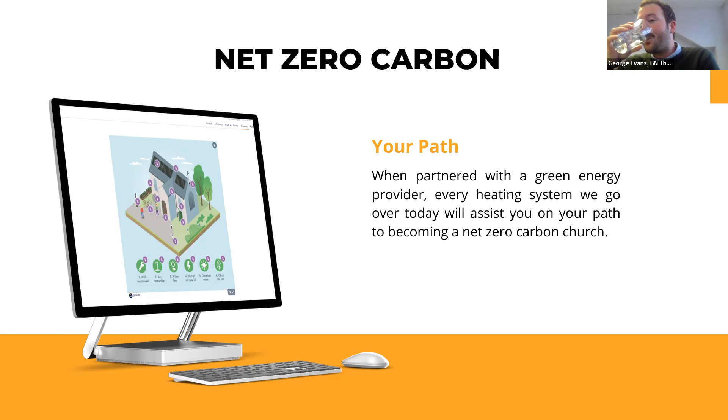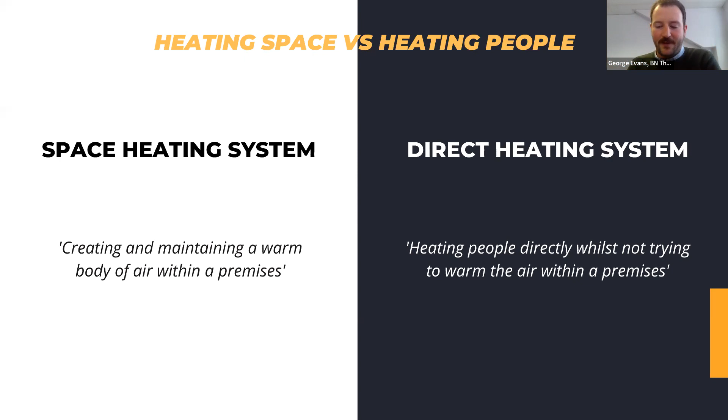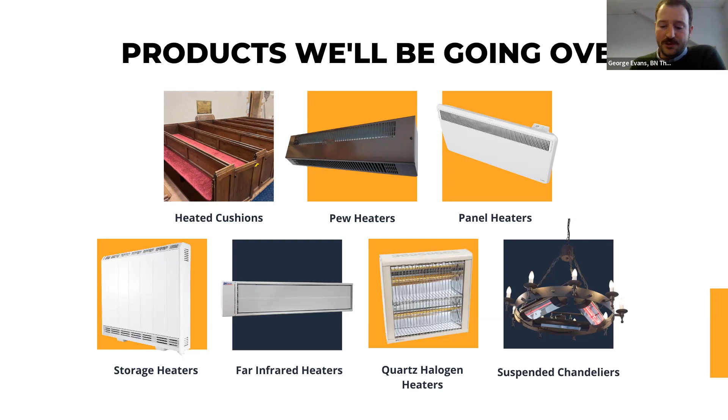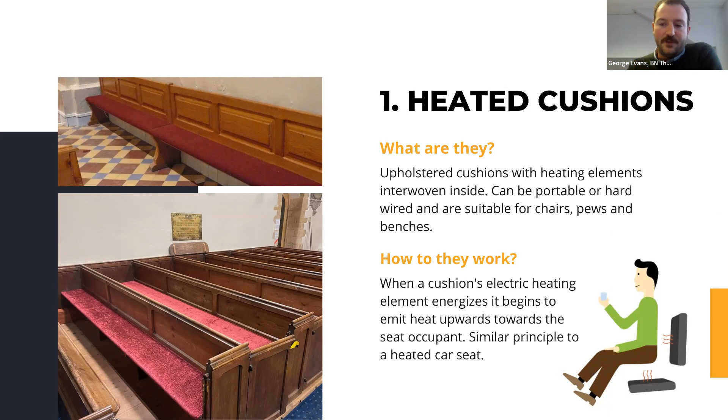How they work: when a cushion's electric heating element energizes, it begins to emit heat upwards towards the seat occupant, a similar principle to a heated car seat. In my little diagram here, my little man in the green shirt, his system has a heated seat and a heated backrest. In the photos, they're just a heated seat, and a lot of them are custom made for the size of your pews or seats.

Space heaters or direct heaters: for all of these slides I've put a little gauge in the bottom left. Heated cushions are definitely direct heaters, direct people heaters. Heated cushions are designed to live on pews or seats and directly heat occupants. Their main role is not to try and warm all the air within a church, it's about heating the people occupying a seat.

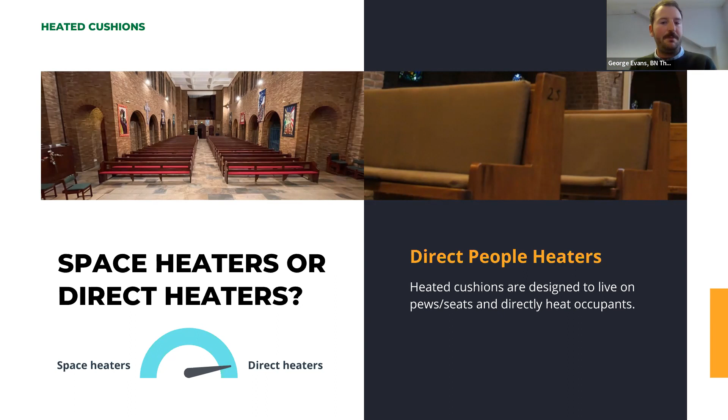Going back to heated cushions, I'd say an intermittently used church — they're very suited for those, where people come in on a Sunday, you turn them on 10 minutes before a service and then turn them off when you're finished.

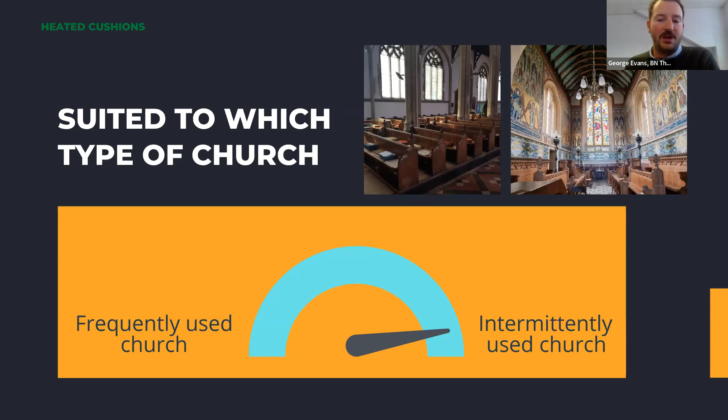So the pros for electric heated cushions: unobtrusive. Heated cushions are incredibly unobtrusive and emit no light, noise, or draft output. They go virtually unnoticed.

Incredibly economic. Heated cushions require virtually zero warm-up time and are usually only on for an hour at a weekly service.

Aesthetic and comfort. Heated cushions usually come in different fabrics and designs to match or add to the aesthetic of your church. They also tend to be made using soft insulation, so they are quite comfy to sit on.

One of the pros here is easy install. Now this is for a portable heated cushion, so this isn't one that's installed and uses mains power. This is portable, battery powered. Portable heated cushions do not require an electrician to install, so they're really an install that you can do yourselves.

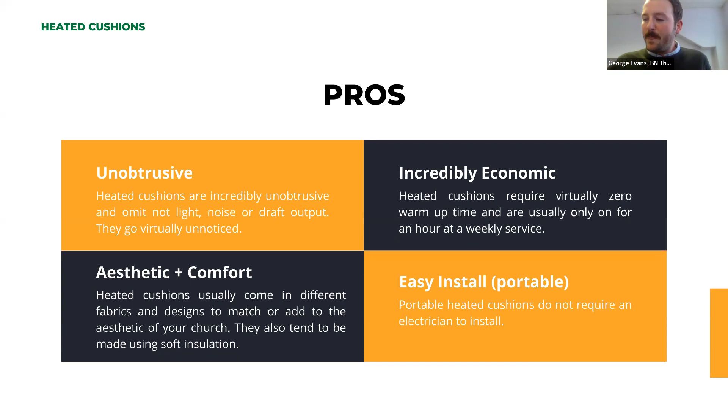Okay, so cons of heated cushions. I guess this one's a bit of a pro and a con: requires charging. Again, this is if you've got a portable system. Portable cushions require their batteries to be charged, which is not a terribly laborious task, but if you've got 100 of them, you will have to put that into consideration. Someone will be in charge of charging all of those cushions.

One of the other cons, which you'll see come up with a few of the other products, is you can't heat the chancel or vestry, etc. As heated cushions only heat seat occupants, they will not heat people standing in the chancel, the vestry, the narthex, etc. So you'll walk into a church, it will be cold, and you will only be warm when you are sitting down.

And I think the only other con I've got here is that they have a low output. Heated cushions have a very low output and may require additional heaters. We all know how cold churches are, and you might find yourself sitting on your hands after a while.

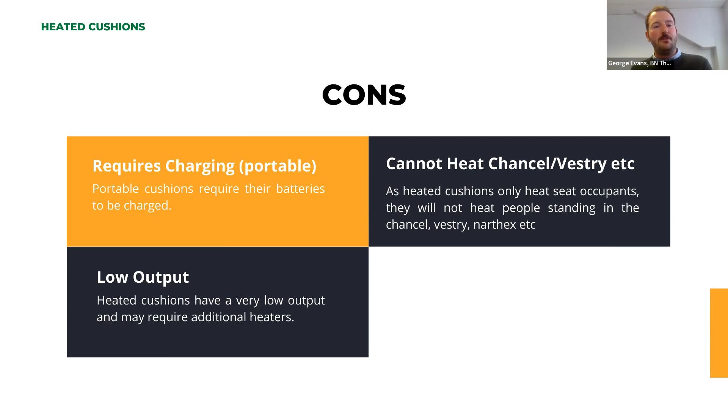Okay, so just to recap, heated cushions are direct heaters, heating people, and they're ideally suited for an intermittently used church.

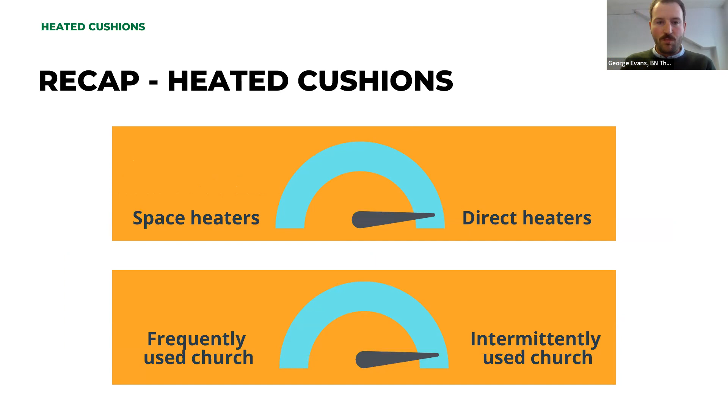Okay, product number 2 are pew heaters. So what are they? They're a low-level convector heater that lives under church pews and heats people directly. They were actually used in the first net zero carbon church, which was St Andrew's in Chedworth over in Gloucestershire.

So how they work, you can just see the little diagram in the bottom there. Cold air enters the heater at the bottom, passes the heating element, and then warm air convects upwards. This creates a gentle breeze of warm air that rises past pew occupants, which you can see on that diagram.

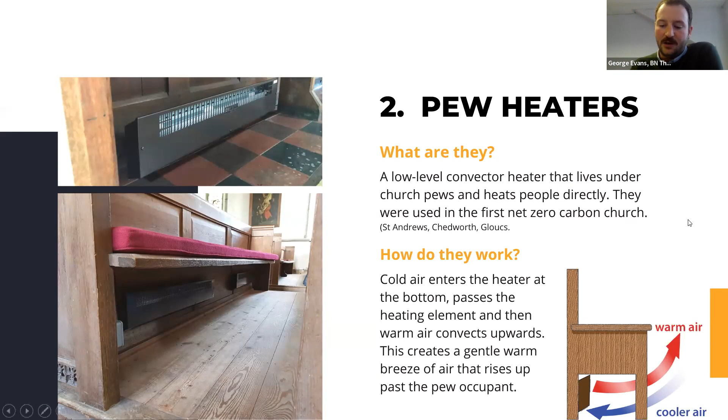So space heaters or direct heaters, they are very much direct people heaters. Pew heaters are designed to live under pews and directly heat pew occupants.

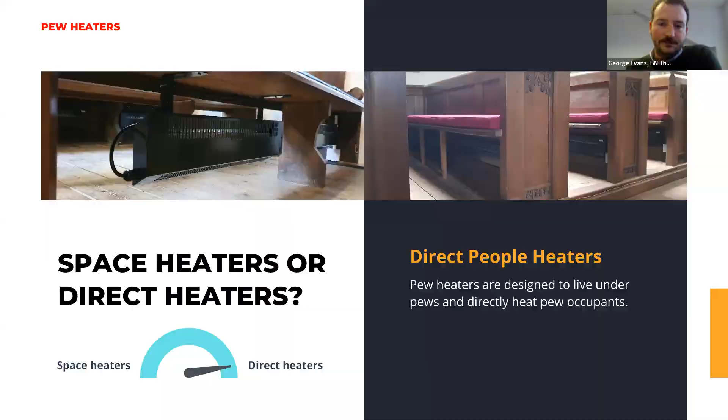Suited to which type of church? Definitely an intermittently used church. They get up to temperature very quickly, so for a Sunday service, you can have it on a couple of minutes before and turn it off when you're finished.

So pros: unobtrusive. Pew heaters tend to be powder coated brown and emit no light, draft or noise output. They go virtually unnoticed. Incredibly economic. Pew heaters require virtually zero warm-up time and are usually only on for an hour a week.

Now, I did a little bit of working out here. So let's make up a pretend church here that we've got 30 pews, 15 on each side, and on each pew you've got two 300-watt heaters.

Now, I Googled the average UK tariff at the moment, and it reckons it's 34p, so I've done it at 34p. So if you've got a 34p per kilowatt hour tariff, a service would cost you £6.12, and that's to heat every pew in your church. If you've only got half the congregation in, half the pews are occupied, it's £3.06.

And if any of you are lucky enough to still be on a fixed rate tariff that's down around 15p an hour, you're looking at £2.70 for my pretend church, every single pew to be heated. So I thought I'd just put that in there to give you a real life example of how cost effective it is.

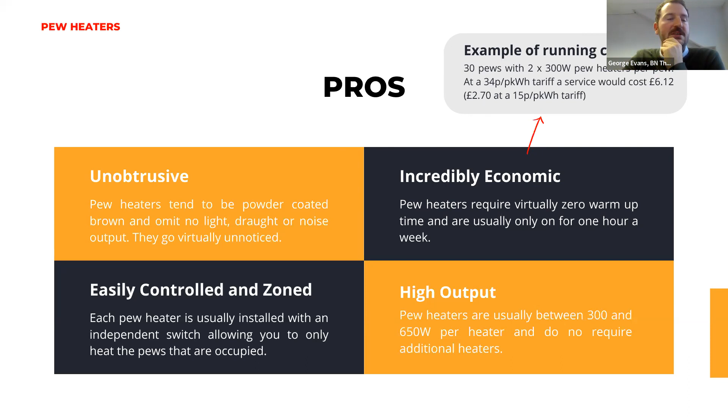Heat output as well. Pew heaters are usually between 300 and 650 watts per heater. They do not require additional heaters, and they do kick out a lot of heat.

Cons. It requires fixed pews. I know that sounds obvious, but if a church has no pews or movable pews, you cannot install pew heaters. I have seen people try it, and it's a health and safety nightmare because there are cables running everywhere.

So if you haven't got fixed pews, you can't use pew heaters. One of the big cons as well is power, and you'll see this come up for a lot of these heaters. The electrical load of a multi-pew heater installation often requires an upgraded electrical supply. This is really important, especially if you're in a more rural area and need to bring in an upgraded supply - you're going to have to get a quote for that before you start. I think that's really, really important to point out.

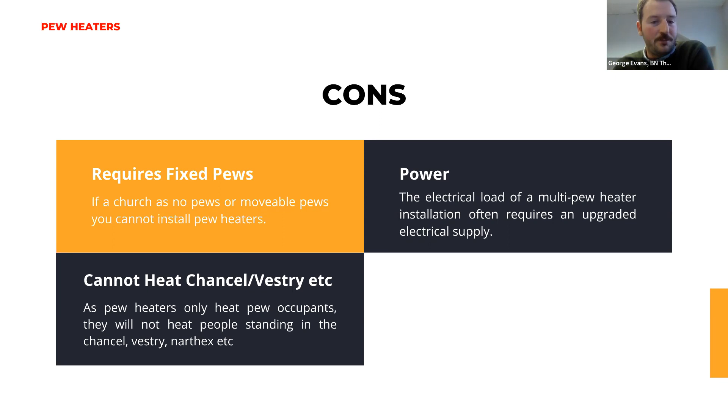And again, just like the cushions, it cannot heat the chancel or the vestry - it'll only heat people sitting on pews. So you'll walk into that church, it will be cold, you sit on a pew, and it will definitely warm you up.

So to recap, pew heaters are direct heaters - they heat people directly - and they're ideally suited to an intermittently used church.

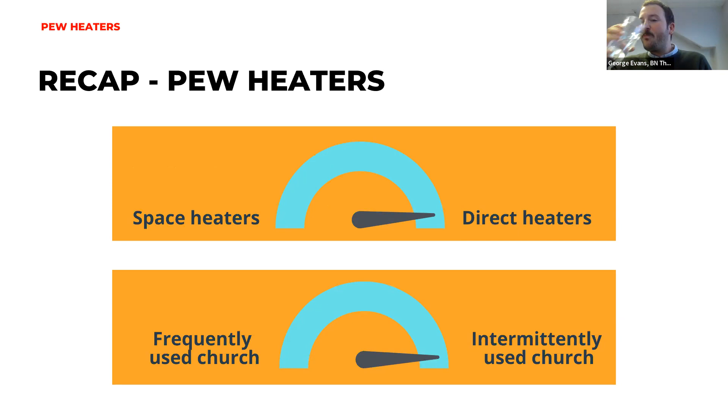Okay, so product number 3: storage heaters and panel heaters. I've put these two together because they are very similar, but there are a couple of nuances that make them different, and I will explain. Ultimately, what are they? They are wall-mounted electric radiator-style heaters that radiate and convect heat into a room. So how do they work?

Storage heaters use off-peak energy tariffs, so Economy 7 and Economy 10, to heat bricks. The retained heat in the bricks then convects into the room when required. So again, it's a radiator-style heater, but it just gets its energy in a slightly different way to the panel heater.

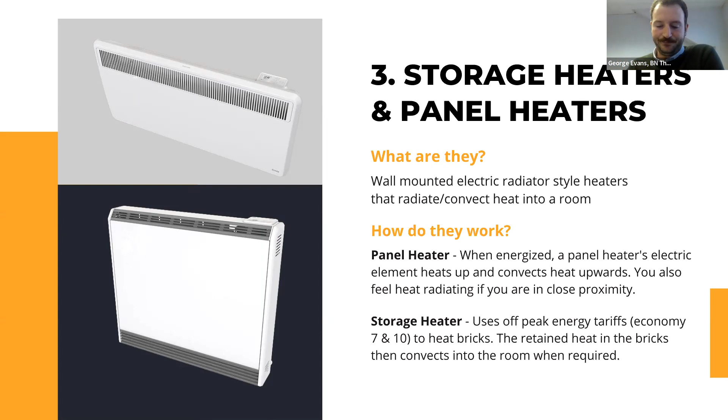So space heaters, or direct heaters - these are definitely space heaters. This is if you're taking your gas system out and you want to space heat your church to 16, 18, or 20 degrees - this is a solution. Storage heaters and panel heaters are both space heaters and will try to build and maintain a warm body of air within a church. They cannot be used to directly heat people.

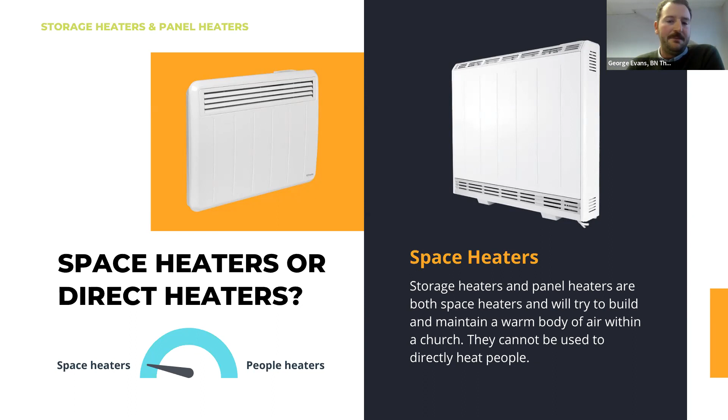So which type of church is it suited to? The gauges go in the other way - it's a frequently used church that you want to keep at a desired temperature throughout the week.

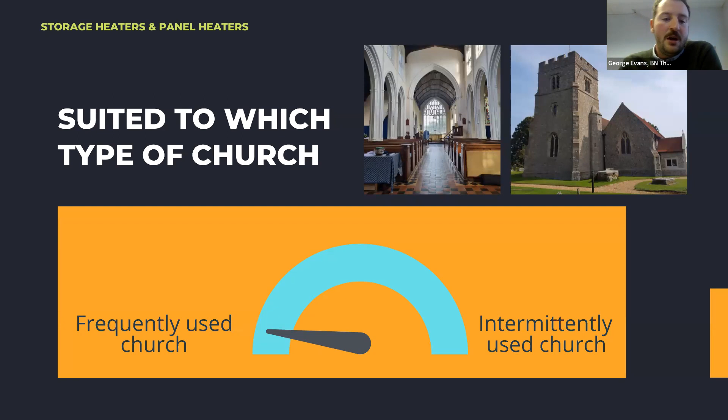So storage heaters and panel heaters - the pros: technology. Technology is constantly improving. Heaters now have built-in setback settings, open window detectors, etc., which all reduce energy consumption. Because a lot of new build domestic projects aren't going with gas, the demand for storage heaters and panel heaters has gone up, and with that, the technology has come on leaps and bounds.

For instance, setback settings allow you to maintain your church at 10 degrees - that's your setback setting. So the fabric, the walls, everything is getting warmer. Then you have a boost to a comfort setting, maybe 18 degrees, for when the church is occupied. What that means is you avoid that awful situation where you arrive Saturday and the church is literally -2, freezing, the walls are cold, everything's cold, and you go 'right, we need it on' and you're trying to boost it up to 20. You end up heating a church for 2 days full blast just to get it going for an hour on Sunday. So the technology and control has come on leaps and bounds.

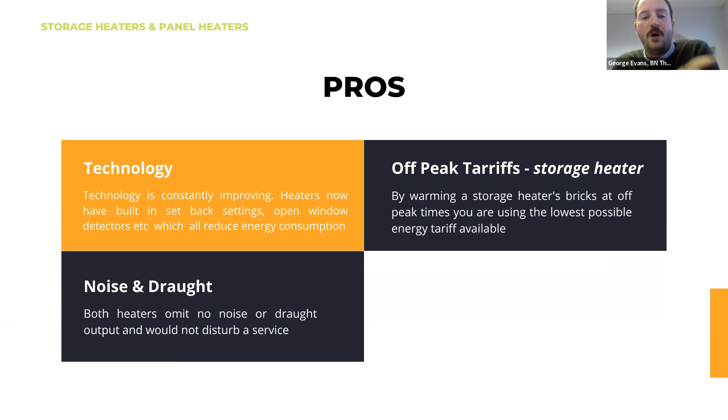Another pro: off-peak tariffs. This is only for storage heaters - by warming a storage heater's bricks at off-peak times, you're using the lowest possible energy tariff available, the cheapest energy off-peak, but then using that energy on peak. Noise and draft: both heaters emit no noise or draft output and would not disturb a service, which is great.

Okay, cons. Mounting. Both heaters need to be installed onto walls. Most churches have limited space and you will often need 5, 10 or 15 heaters.

If you're space heating and you've done a heat loss calculation, and to outweigh that heat loss and heat your church you need 30 kilowatts, chances are you're going to need 10 3-kilowatt panel heaters. They're going to have to be equidistant, spaced nicely around the church, which creates all sorts of problems because you've got pews. That's definitely one of the cons of going with a radiator style heater.

Heat loss is another one. Both heaters convect heat which will rise and escape. This heat loss will greatly affect warm-up time, which in turn negatively affects energy consumption.

So the problem you get is obviously heat rises. So you turn these heaters on and all your warm air will rise, go to the roof, which is uninsulated, and will escape. And you're almost waiting for that air to come down to ground level. On average, you're looking at about 2.5 degree temperature increase per meter of elevation. So if you've got a church with a 10-meter ceiling and your panel heaters have worked so that it's 20 degrees at ground level, it could be 45 degrees at the top, and that's all that warm air that you've paid for is now escaping up the top. That's heat loss, and it's one of the problems.

You'll all know this if you've got a gas heating system, because you've got exactly the same problem, and all the birds are nice and warm on your roof.

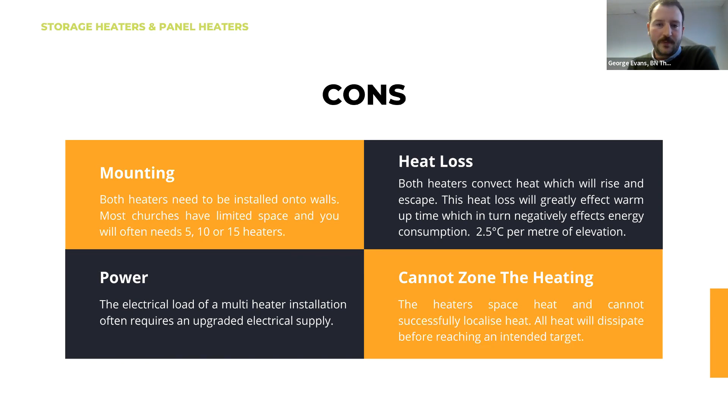Okay, so to recap, storage heaters and panel heaters, they are space heaters and they are ideally used in a frequently used church.

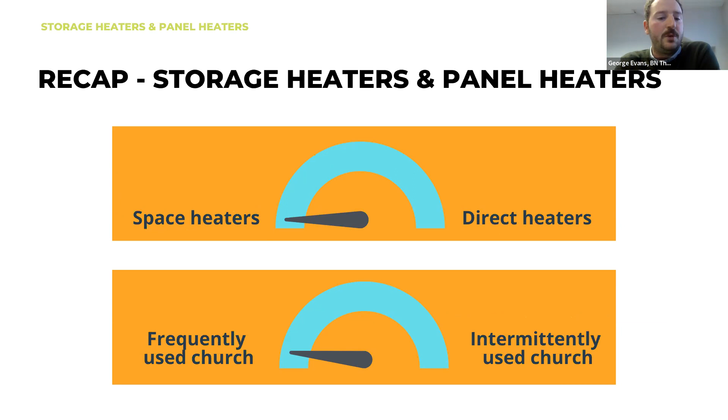Okay, far infrared heating. I'll be very honest, this was the toughest product to talk about. So far infrared, in the industry, we usually call it long wave radiant. So you have long wave and short wave. Far infrared was a sort of German term that crept into the UK. Now, I'm a massive fan of long wave radiant heating. It's one of my favorite heaters out there. Personally, I've specified them in all sorts of applications, but you've got to know what you're doing. There has to be a design done. You've really got to pay attention to what's going on because it can go wrong. And I will explain all of this.

So what are they? They're radiant heaters that provide gentle comfort heat. How do they work? Far infrared long wave radiant heaters work in a similar way to the sun. The sun warms the earth, but you feel warmer when you're in the sun's rays. A long wave radiant heating system will space heat a room, a premises, a church, and humans will feel warmer when they are under the beam of the heater. We call that beam the radiant effect, when you're under a beam of a long wave heater.

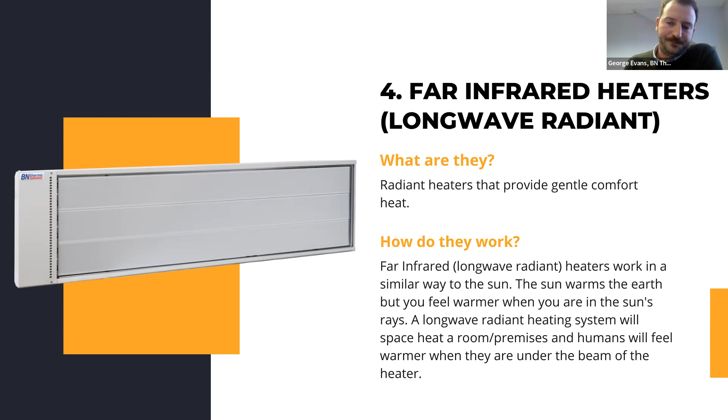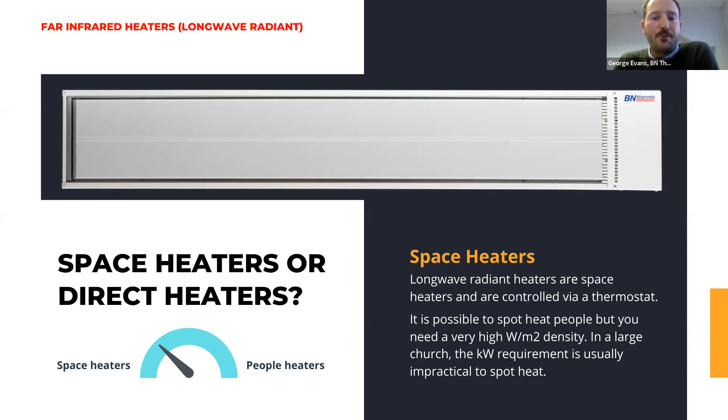So space heaters or direct heaters, you can see on the gauge it's leaning towards space heaters. Long wave radiant heaters are space heaters and controlled via a thermostat. But my gauge isn't all the way down because it is possible to spot heat people, but you need a very high watts per meter squared density. In a large church, the kilowatt requirement is usually impractical to spot heat. And again, I will show you an example of that.

Suited to which type of church? Again, it's leaning towards a frequently used church. It's space heating, put it on a timer, put it on a thermostat. It's a wonderful system.

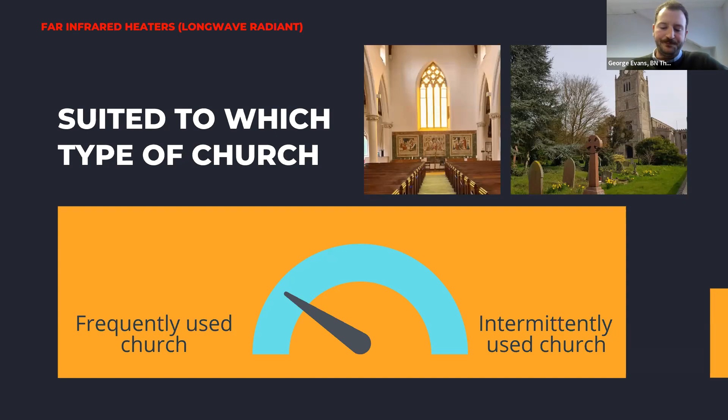Pros of far infrared heaters / long wave radiant: unobtrusive. Long wave radiant heaters emit no light, draft or noise output. They go virtually unnoticed and often can be mounted up to 9 meters. So you can really get them up out the way and you don't even know they're there.

You can set your thermostat, say you want it to be 20 degrees in your church, you set it at 16. Which doesn't sound like much, but if you imagine you've got a 30 or 40 kilowatt load, and it's stopping at 16 versus stopping at 20, that buffer is energy saved. Times that over 6 months, especially at the tariffs we're paying now, that is a huge saving. So you're not having to whack it up to 20, you get it to 16 and it's comfortable.

And my office is exactly like that. I think my thermostat's at like 17 and it's wonderful, and I've had to put the fan on because it's too warm. So it's a really, really energy efficient system.

The second part of the energy efficiency of long wave radiant heat is that the heat gradient is negligible when using long waves. So experienced temperatures at ground level are similar to the temperatures at high level. With a panel heater, you've got that 2.5 degrees per meter of elevation, so it's getting very warm at the top of your church. With long waves, if you got on a step ladder and went to the top of your church, it's almost the same temperature as at the bottom. So you haven't got that heavy cloud of warm air at the top that's escaping. This is why I'm a massive fan of long wave heaters.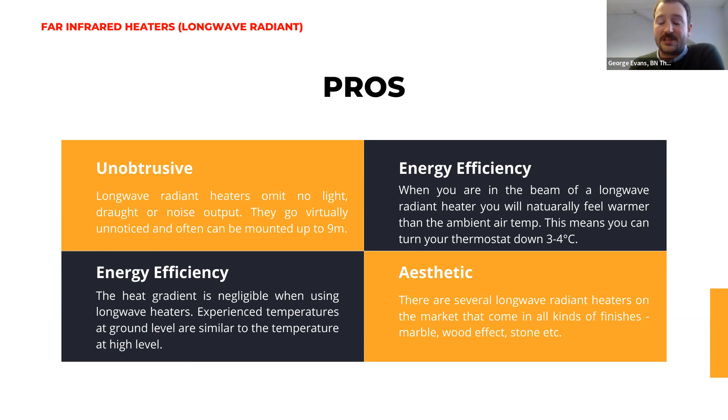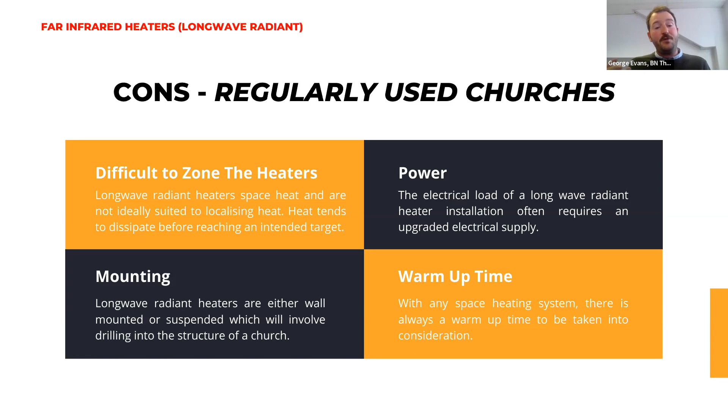Now, I wanted to put this slide in - sorry if it's a bit confusing, but when I started this I said I've seen the good, the bad and the ugly. This is sometimes where I've seen the ugly - I'll be very honest, I feel people are sometimes sold a dream of this magic heat that you can't see, that spot heats immediately and is great. And I've been around the block enough to know that that often is not true.

So the con of using long wave radiant heating in an intermittently used church - your church that's freezing cold, you need it for an hour on a Sunday and you're sold on this technology - is the kilowatt requirement for spot heating. It is possible to provide localized heating with long wave radiant heaters, but you need a very high watts per meter squared density. If a church needs instant heat, you are solely relying on the radiant beam of the heaters, so we're ignoring the air temperature. We just want to be in that beam of the heater, which might be 5 or 6 meters in the air.

So this little orange box on the side here, spot heating density, and I've made up a church. Now I've got a nave that's 20 by 7, which I think is reasonable. I've got 2 aisles that are 20 by 4, and a chancel that's 5 by 7, so you're looking at a 335 meter square footprint.

Now, if you came to me and said, George, we're sold, we need far infrared, heat my church, get it to 20 degrees, I'm going to go in at 300 watts per meter squared. That means you would require 100.5 kilowatts, or 435 amp, which is highly impractical.

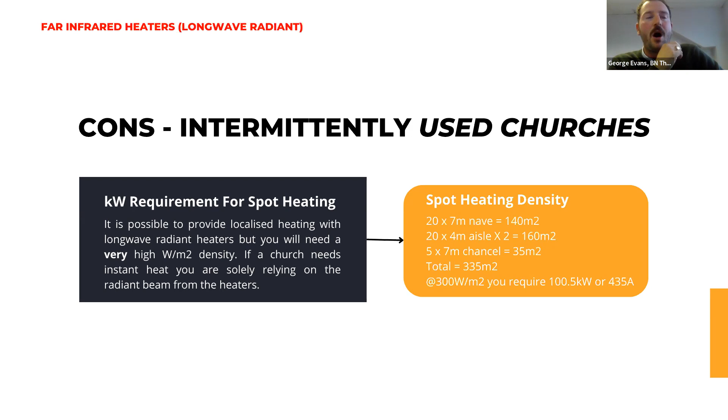Usually when you upgrade your power supply, you get 100 amp 3-phase, meaning you get 300 amp to play with. You'd already be 50% out on that, and that's before you turn the lights on, before you boil the kettle. So I hope that makes sense.

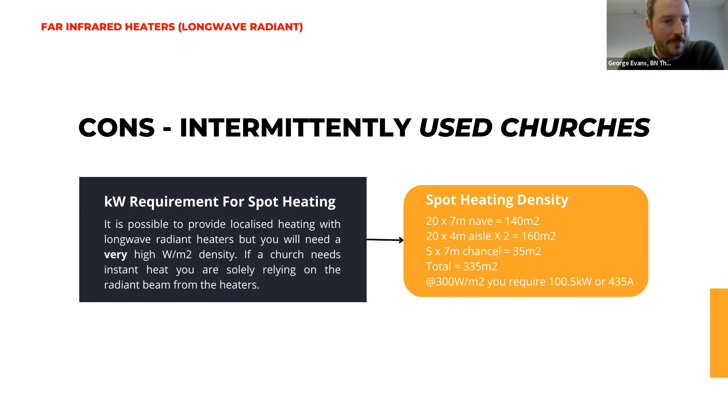I just wanted to include this slide to say it is possible to spot heat with far infrared, but please get a design done. Speak to a manufacturer, speak to your installer, ask someone what assumptions they've made and how they've designed a system, because I've seen it go wrong, but it can go right. So I hope that wasn't too confusing.

So just to recap, far infrared heaters, long wave radiant, they're a brilliant heater. They're great for space heating, and they're great if you've got a frequently used church and you can get this system bobbing in and out on a thermostat.

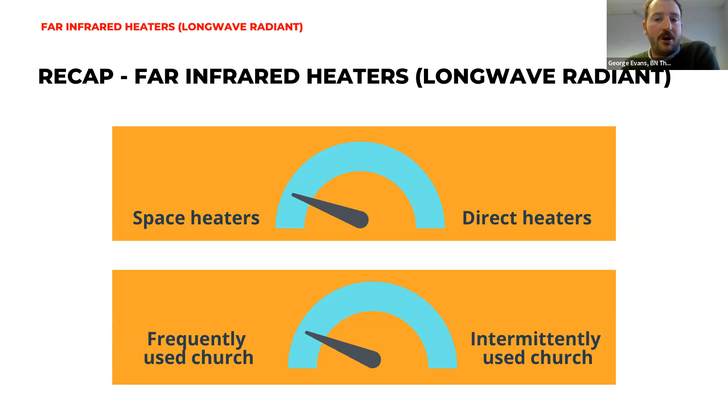Okay, shortwave quartz halogen heaters. This is product number 5. We are rattling through this. Okay, shortwave quartz halogen, what are they?

Radiant heaters that provide instant comfort heat. How do they work? Shortwave quartz heaters heat mass, so people and surfaces, not air within a premises. When the heaters are energized, any person within the beam of the heater feels instantly warm. The heaters are usually switched on 5 minutes before a service and turned off as soon as it ends. They are the definition of direct heating.

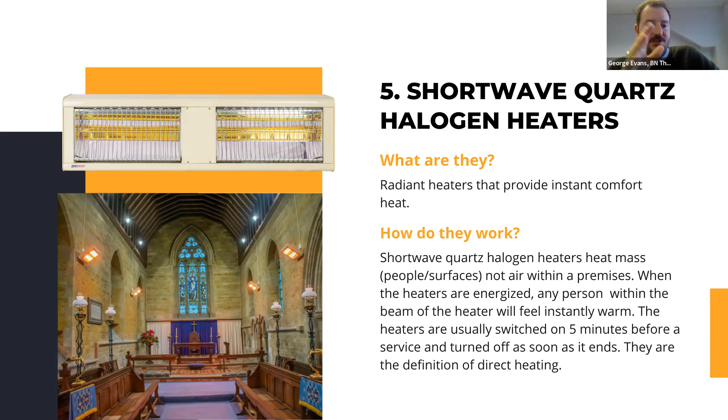There is no heater that will warm up quicker, and that's categorically true. They are instantly up to 100% efficiency immediately as soon as you turn them on. So space heaters or direct heaters, they are direct people heaters. Shortwave quartz halogen heaters heat people, not the surrounding air. They're incapable of being used to space heat. As soon as you turn them off, you're back to it being freezing cold in your church.

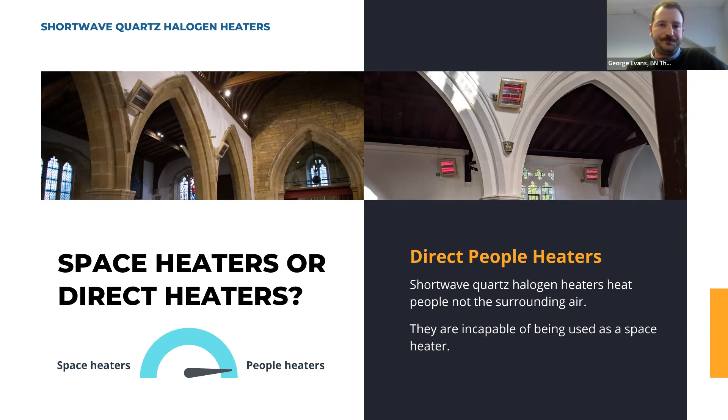Suited to which type of church? Definitely an intermittently used church, because they're up to temperature so quickly. So your Sunday service, 2 minutes before you turn them on.

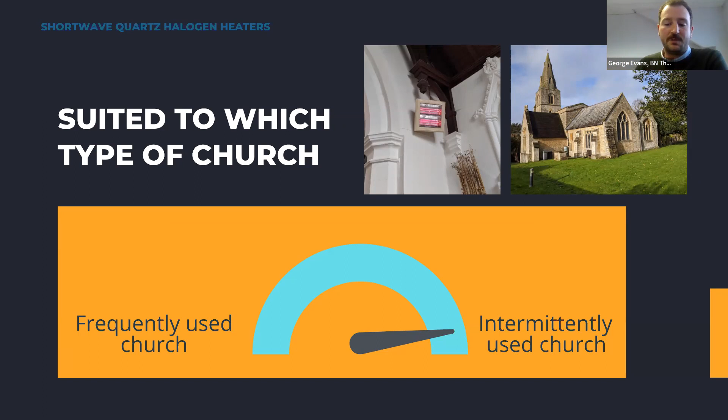Pros: well, zero warm-up time. Quartz heaters are instantly effective, meaning no warm-up time is required and no energy is wasted. They can be energized 2 minutes before a service. 2 minutes or 5 minutes, it doesn't really matter. I guess if you put it on 5 minutes before, you might just take the chill off the pews slightly. But again, you could turn them on 10 seconds before anyone sits down.

Running costs, as they are instantly effective, most churches only need the heaters on for an hour a week, and most services will cost less than £10.

Heaters easily zone. As heaters directly heat people, you are able to localize heat into the nave, aisles, the chancel, and it allows you to adapt to the size of your congregation or event. It means if you're having a meeting during the week, you can put one heater on, all sit under it, and you'll be instantly warm. Or if only half of the nave is occupied, you can heat the front half, just turn the heaters on at the front, so you can zone it very easily.

And I've put user-friendly controls here. Quartz heaters are usually controlled via push-button timers and simple on-off switches. I know the cushions of the pew heaters are as well, I could have mentioned that. But yeah, the quartz halogen heaters, usually you see a switch and it will say aisle 1, aisle 2, nave. It's really, really simple on-off switches.

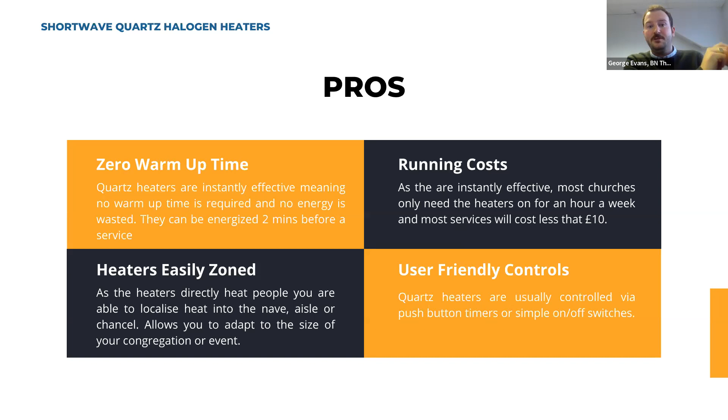So the cons for shortwave quartz halogen heaters, the number one is definitely the light output. Traditionally, shortwave quartz halogen heaters give off a red glow/light output, which is often unpopular with churches. And what I would say is if you go back 10, 15 years, you have ruby red lamps in the heaters, you turn them on, they are glowing red, really, really deep red. I think lamp technology has come on leaps and bounds.

So if you're looking at this style of heating, do your homework, see some samples, speak to some manufacturers, because they are working on reducing that light output all the time.

Cons, again, power. The electrical load of a shortwave radiant heater installation often requires an upgraded electrical supply. And mounting, again, is another con. Just like the long wave heaters we looked at, shortwave radiant heaters are either wall mounted or suspended, which will involve drilling into the structure of the church. What I might add there is with the shortwaves and the long waves, it's usually they'll be mounted about 4.5 meters on the arches if you've got aisles. And if you haven't got aisles, they'll just go straight up onto the wall.

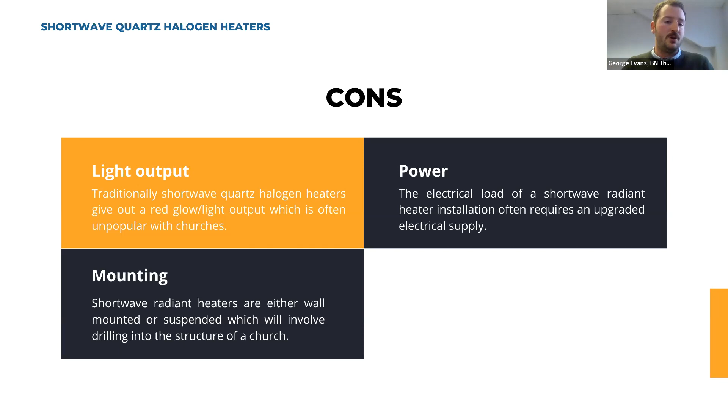So to recap, shortwave quartz halogen heaters, they are definitely direct heaters and they work very well in intermittently used churches.

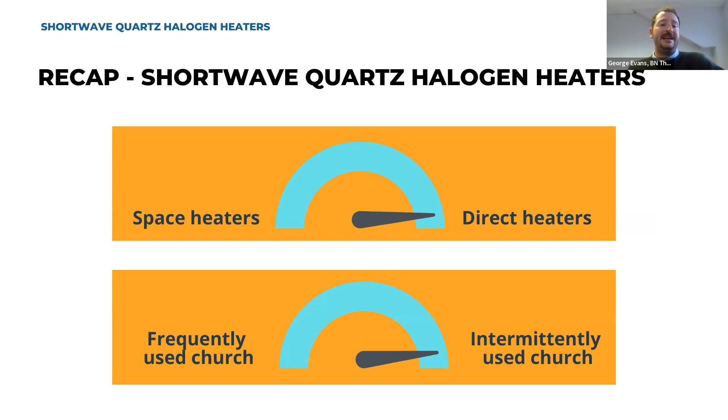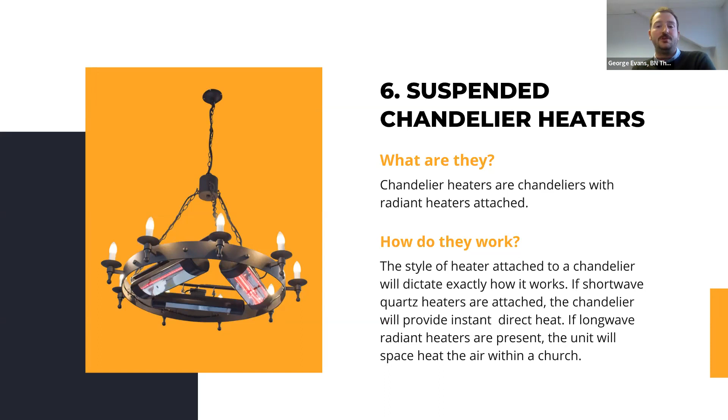Okay, this is the last product we're going to look at, which are suspended chandelier heaters. So what are they? Chandelier heaters are chandeliers with radiant heaters attached. How do they work? The style of heater attached to a chandelier will dictate exactly how it works. So if a shortwave quartz halogen heater is attached, the chandelier will provide instant direct heat, just like the one in the photo. And if a long wave radiant heater is present, the unit will space heat the air within a church. So it very much depends on what heater is attached to the chandelier. Again here, space heaters or direct heaters very much depend on what heater is on there, hence my gauge being in the middle. It depends what heaters have been installed onto the chandelier.

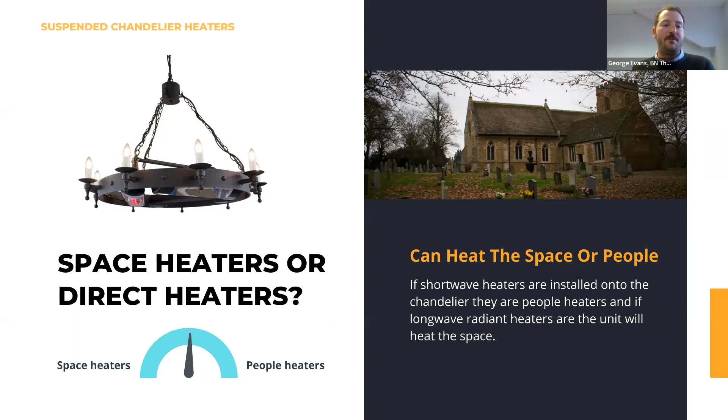And again, suited for which type of church, it depends what heaters are on there, and that will dictate what type of church they are best suited to.

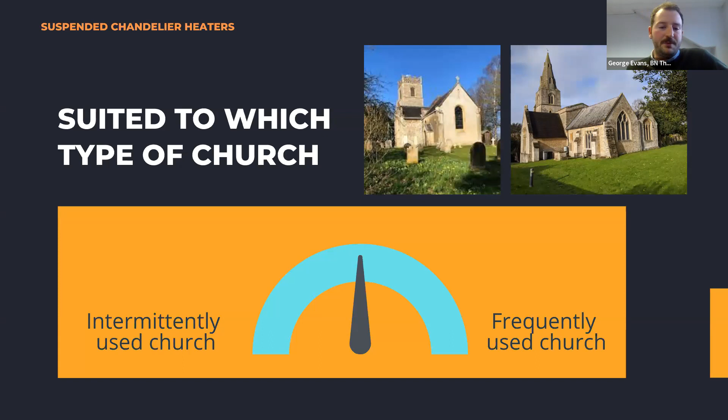So the pros, hang on a second. I think the aesthetic is a big pro. I think they can look great. Chandeliers can really add to the aesthetic of a church. If you have a lot of them, they have really quality lighting options on them as well. If you're going to go down the route of having radiant heaters, having them tucked inside a beautiful looking chandelier, I think that's really good personally.

Mounting, as the chandeliers are suspended, you can avoid drilling into walls. Now, some churches have beams you can easily hang chandeliers off. That's the best scenario. I'm not an expert when it comes to grade listings, but I've heard before that the fact you can hang a chandelier means you're not drilling into anything, which I think you'll probably get a thumbs up if you grade 1 listing. Again, you can look into that yourself.

Sounds a silly one, but one of the pros is choice. So if you're sold on the idea of getting chandeliers in your church, you have the choice then to whether go for long wave or short wave heaters, depending on how frequently you use your churches. So it gives you that choice.

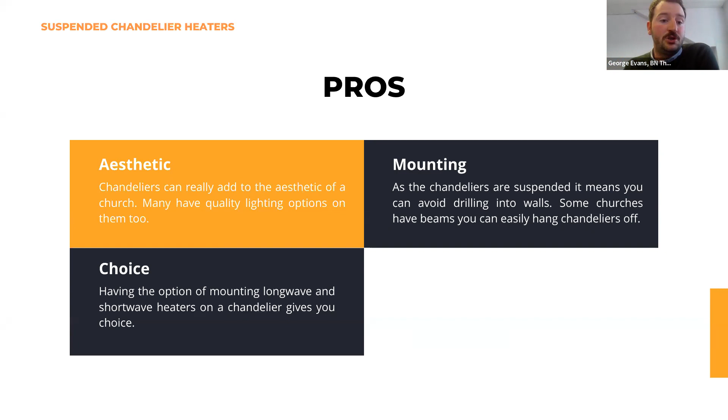Cons, I've put light output there. If you've gone for short wave heaters, you might get that red light output, which is a con. And I must admit, I've seen a couple of installations in the flesh and they've tended to be the short wave instant heat. So you will get that red light output.

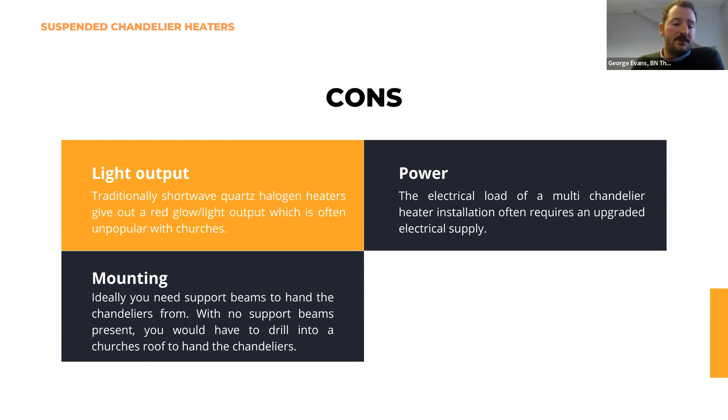Power in here again. If you've got multiple chandeliers, you will probably need to upgrade your electrical supply. And mounting can be a pro, can be a con. Ideally, you need support beams to hang the chandeliers from. With no support beams present, you would have to drill into the church's roof to hang the chandelier. So I've seen some chandeliers that are metal. I'm imagining they'd be fairly heavy. You put 4, 5, 6, 7 heaters on there, I imagine they'd be fairly heavy. So you'd have to get someone to really look at that roof, make sure it's load bearing, and that you could put multiple chandeliers on there.

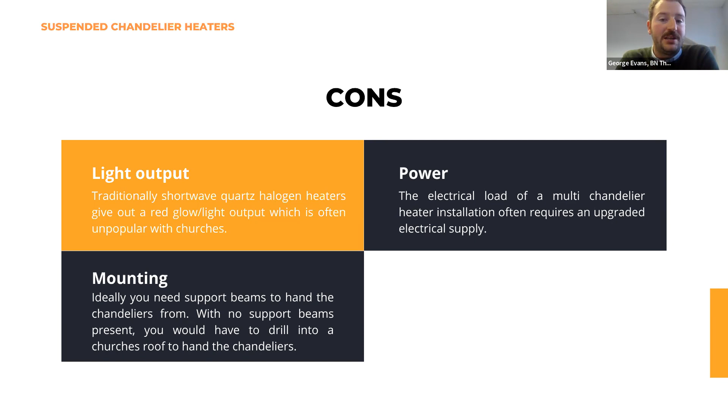To recap, sorry, this slide doesn't really help you at all. Again, depending on what style of heater you've got on there will dictate whether it's going to be heating the person, heating the church, or if it's good for an intermittently used church or a frequently used church.

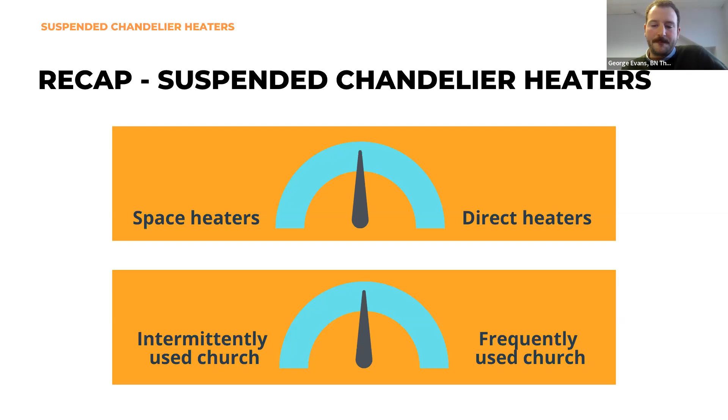So I've absolutely rattled through that. I hope that was interesting. I see the Q&A is filling up, which is great.

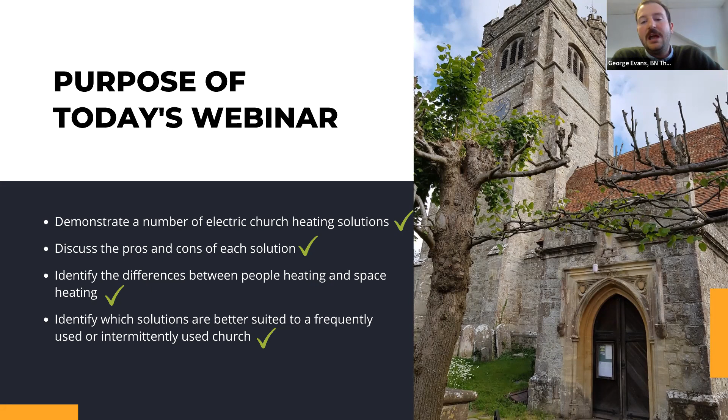Just to recap, the purpose of today's webinar, to demonstrate a number of electric church heating solutions. I hope I've done that. I hope we've covered some interesting stuff there. Discuss the pros and cons of each solution. I've tried to be fairly honest there. As I say, I've seen the good, the bad, and the ugly, and I just want to help people make informed decisions. Identifying the difference between people heating and space heating. I hope I've explained that. Identify which solutions are better suited to a frequently used or intermittently used church. Again, I hope that has helped.